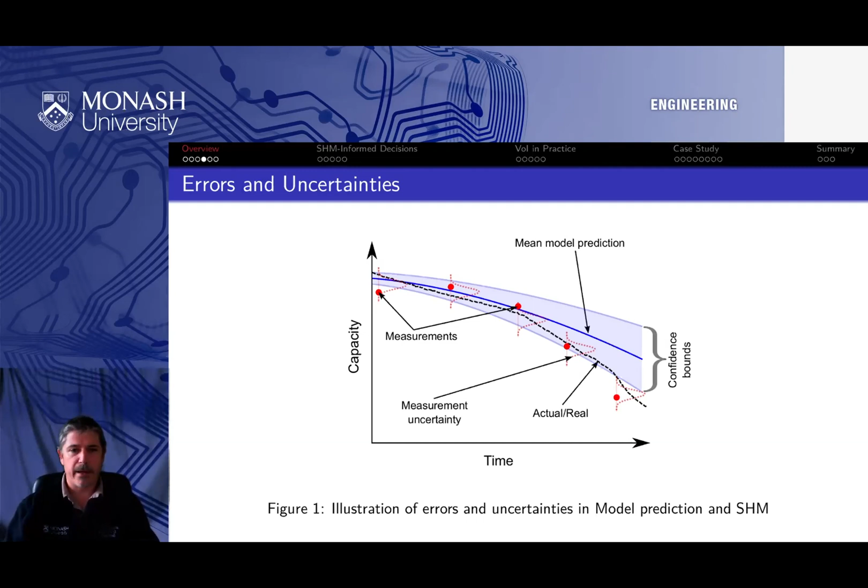We've also seen quite a range of structural health monitoring solutions. And so some may get us closer to the true value of a system. Some may push us away from it. Cost and accuracy are critical aspects of choosing a good structural health monitoring solution. So how do we choose one? How do we pick one over another?

And so to me, the value of structural health monitoring is rooted in the decisions that we make around the data it produces. So if we don't use the data, it has no value. So the first thing a client must be willing to do is to use the data, right? If they're not willing to use the data, they will derive no value. So we've got to ask ourselves, and we've got to ask our clients, the asset owners, what would you do without the data? And what's the associated risk there?

And then if you had the data, what kind of decisions might you make? And of course, with each of those possible decisions, there's an associated risk. And SHM's value is derived from the difference between those two situations, right? So you need to be willing to make different decisions on the basis of the data that's coming in. And that's where SHM gives value.

If your decision is going to be the same regardless of the data, well, then there's no value to be gained. So that's a critical thing that I don't think a lot of people talk about.

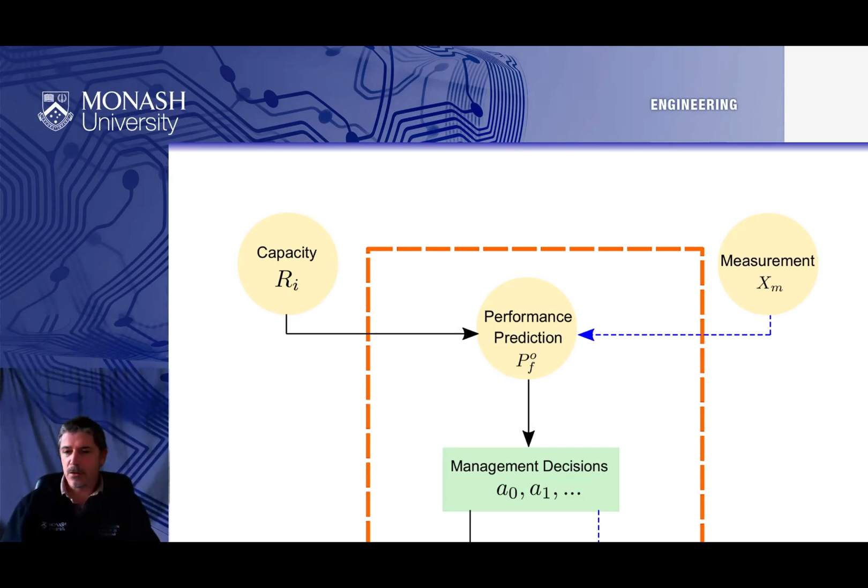So let's have a look at what this looks like in practice. Our research has really been trying to pull the fairly esoteric stuff you've just seen into real world application. And in the real world application, I'll just zoom in here a little bit, we have this kind of information where we have a capacity that we're trying to figure out. We've got some measurement that we might take, and we're trying to make a performance prediction, and usually it's a probability of failure. And of course, given different probabilities of failure, we'd make different management decisions on that basis, right?

And depending on whether or not I have the structural health monitoring data, I've got the benefits I would derive with and without the data. And the difference between those situations is the benefit that structural health monitoring will give me.

So in real engineering, we have tiers of complexity in our analysis, in our assessments, and in our measurements. So these are the different levels of complexity that we might consider. We might decide to use a line model for assessing a wide network of bridges. We might move to a grillage model for assessing a single bridge. We might then move to a three-dimensional FE model for getting in at a fatigue detail, for example.

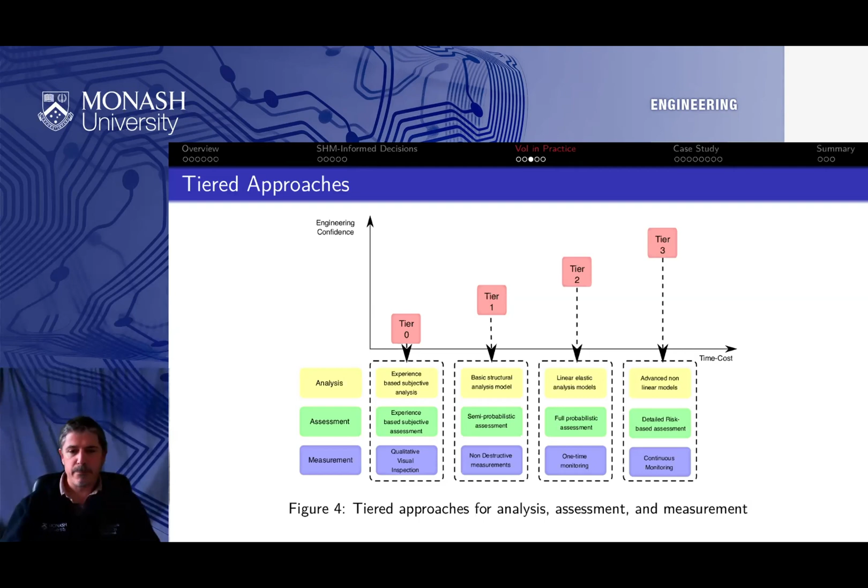So we can apply these tiers across the domains of analysis, assessment, and measurement. So our approach really works in a real engineering sense, because those tiers can then feed into our capacity estimates, our performance predictions, and the measurements that we take as well. And finally, we have the decision trees associated with all of those potential situations.

So before we see any information, we have our prior decision tree where we'd make certain decisions on the basis of what we think the situation might be. If we think about a particular type of structural health monitoring system, type 1 here, we think maybe it's unbiased and it's quite accurate. What kind of decisions would we make? And that's the pre-posterior analysis in the first instance.

And maybe I'm thinking I could derive some really good benefit from some really cheap sensors that aren't so accurate, but it doesn't matter because I'm really ignorant right now. I don't know anything. So a cheap system might really do well for me. So we can compare lots of different structural health monitoring systems and the potential decision trees that will enable us to arrive at an optimum decision.

So a case study, an example application of this. I need to emphasize this is not a real case study, but driven from a lot of my experience. So let's consider the idea that a bridge owner wants to allow an overload vehicle across a bridge. Straight up, should they strengthen or repair the structure? They don't really know. What kind of decisions are available to the bridge owner at this point? And then in that space, is structural health monitoring of some value?

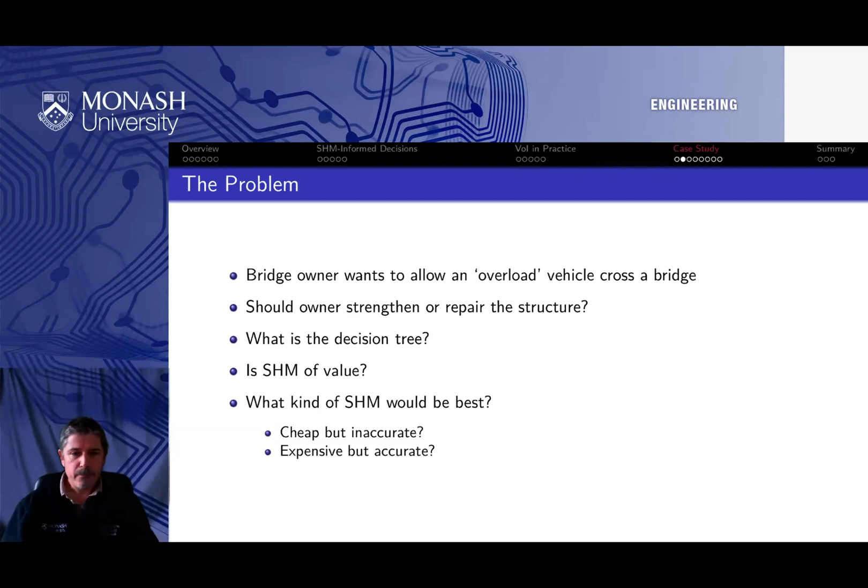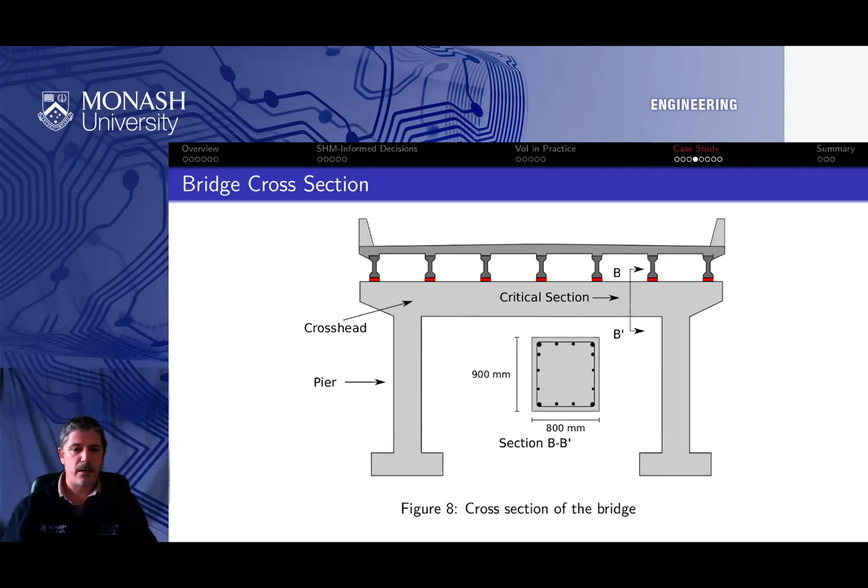So this is our bridge with our vehicle going over it, and there's lots of things we could look at on these bridges, but one of the things that seems to be an issue is shear on crossheads. So we take this example crosshead of the bridge, and we have a look at its shear, and we hypothesize what the decision tree might look like.

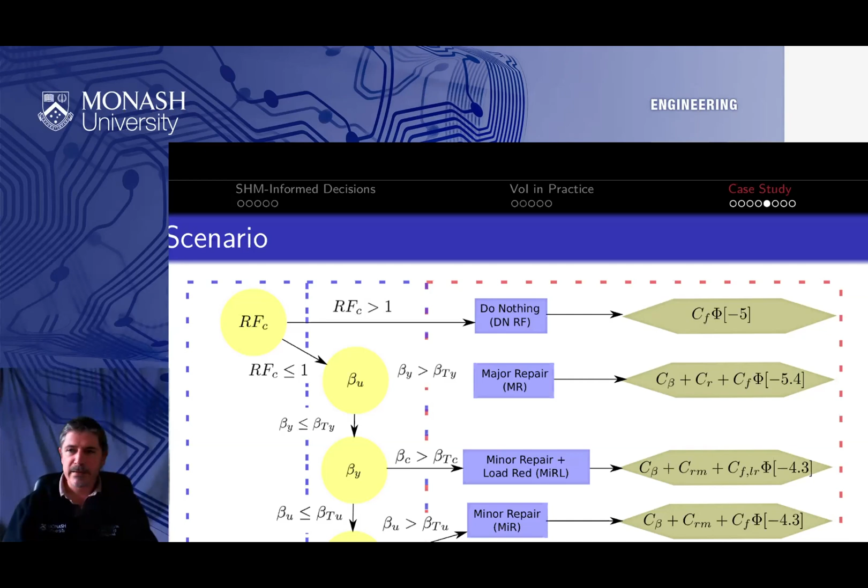So what I've got in this plot is where we start off in typical bridge engineering practice, where we look at a rating factor. And if the rating factor is greater than 1, we're on the top, in the do nothing space, where the cost of a failure times the probability of failure is our risk, and the probability of failure here, where we've got a reliability index of about 5. So these are extremely low numbers, 10 to the minus 7, 10 to the minus 8 kind of space. But that's the risk. That number over here is the financial risk associated with doing nothing.

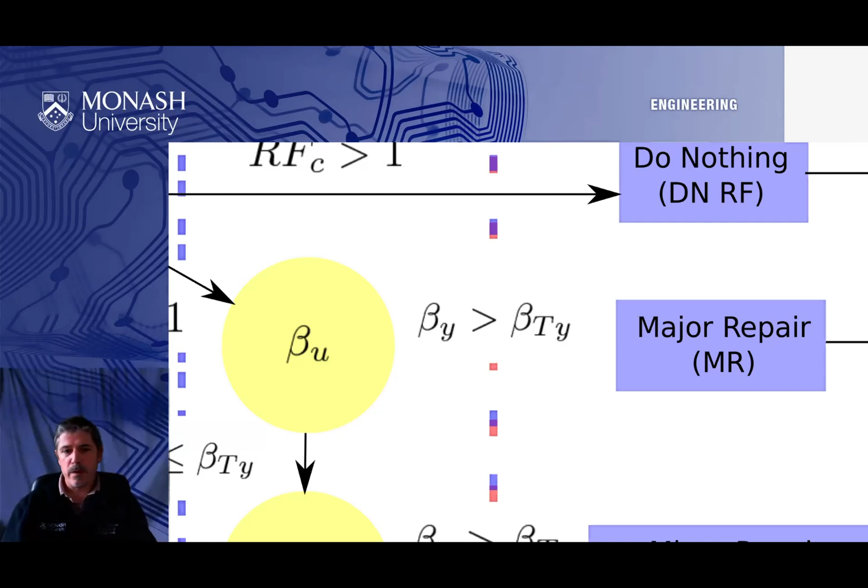But then let's move on down, right? Let's say, and this is more often the space I operate in, the rating factor is less than 1, and the owner is considering a major repair. And here we've got a target level of safety, beta TY, so for yield. And if we're finding that under this permit load we think we're unsafe here, well, then we may go for the major repair situation.

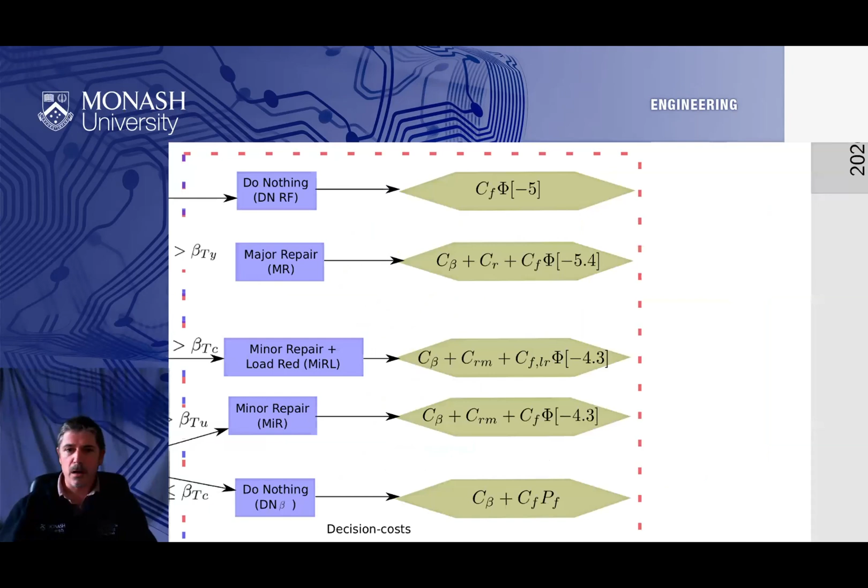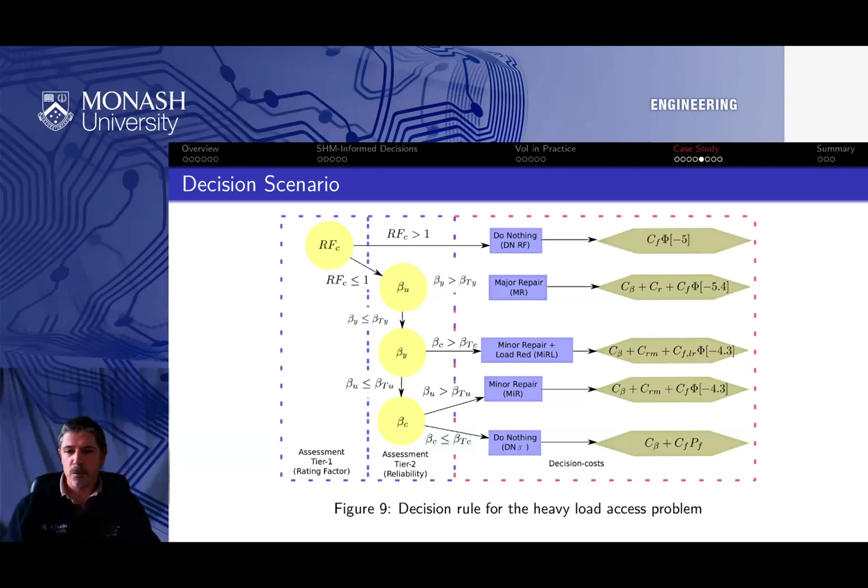And so what we're seeing here is the costs associated with each of the possible decisions. And you'll notice that at this point, we still haven't made any decisions as to whether or not SHM is in place, but at least now we have a quantified cost associated with whatever decisions we would make. And therefore, we can figure out the value that structural health monitoring can offer.

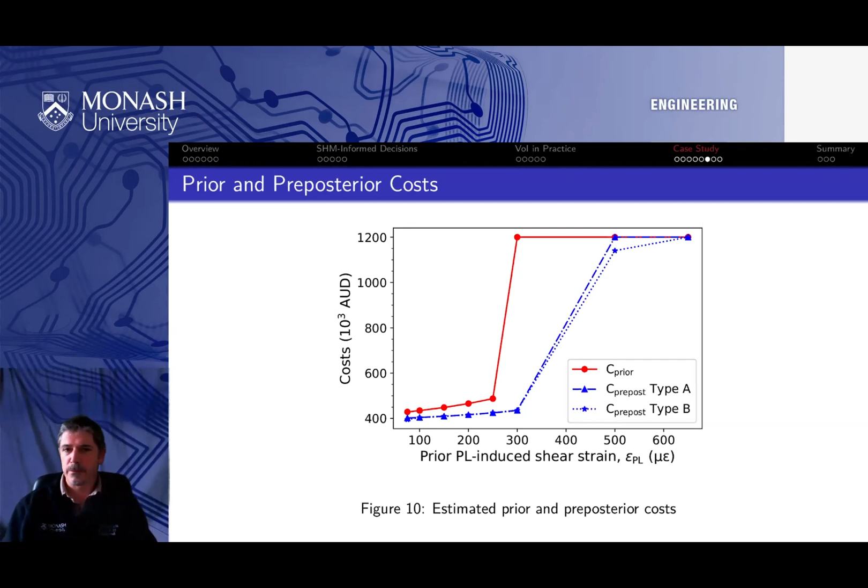And in the example, applying the pre-posterior analysis and using 2 types of structural health monitoring systems, this is the kind of costs that we're seeing. So these are the prior costs and the pre-posterior costs. So we can see that depending on the shear strain that this permit load will induce, we derive certain amounts of value with and without the structural health monitoring system. And so the benefit is the difference here between the red and the blue curves, right?

And then equally, the right-hand space makes sense also, because you can think to yourself, well, this load is really overloading the bridge, and so there is no way that I don't need to do major repair. So putting a structural health monitoring system on, it's not going to tell me something I don't already know, which is that I must repair this bridge.

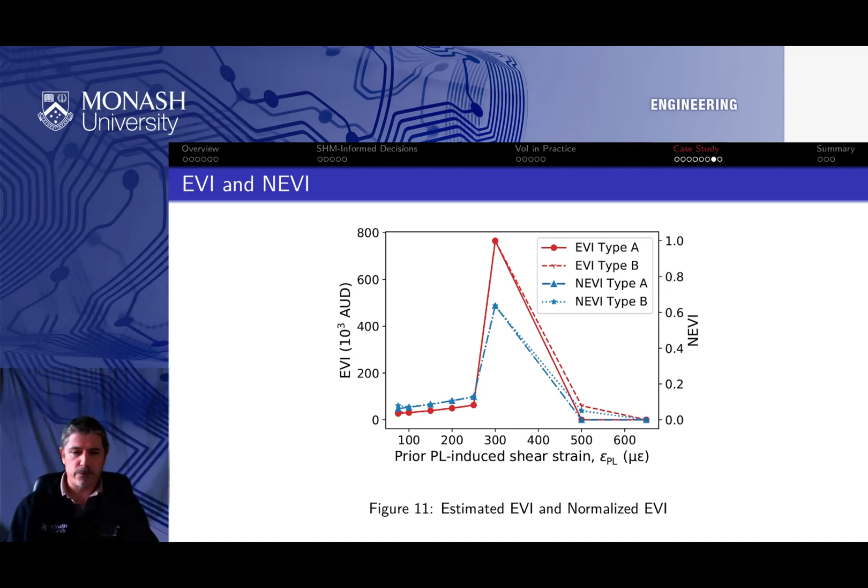So the value of the information that we derive from the structural health monitoring system is low when we're in the very low risk space, and it's low when we're in the very high risk space. Where it has real value is right in that middle space where I'm a bit unsure as to what's going on. And that's when we see the most value from our structural health monitoring. And so that's kind of what I'm able to plot here.

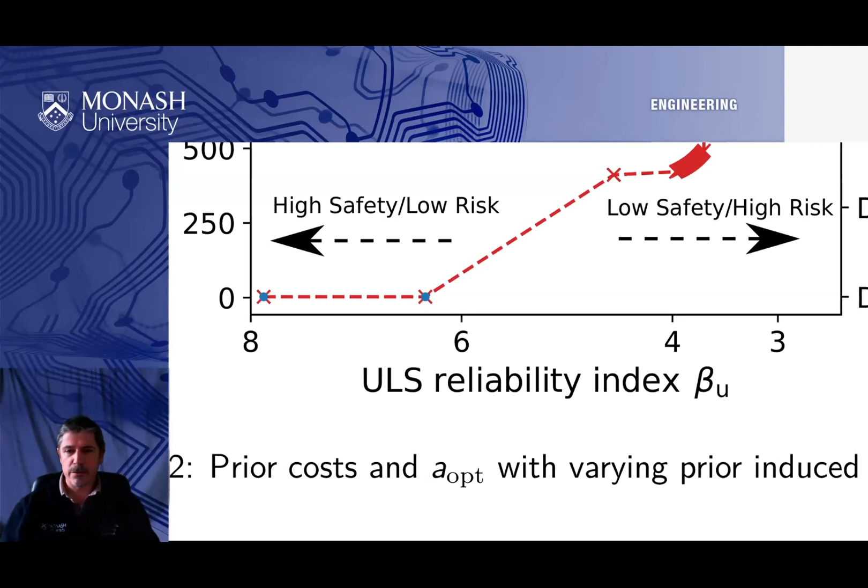This plot's a little bit more involved, I guess. But what we've got across the top is the shear strains. But shear strains on their own don't mean so much. So that's why along the bottom we've got the level of safety that these different shear strains imply. So this level of safety is reliability index.

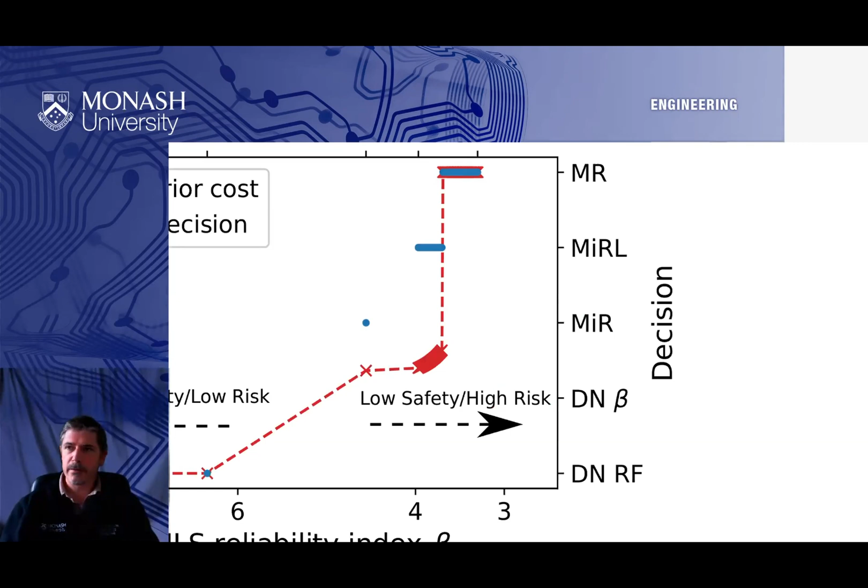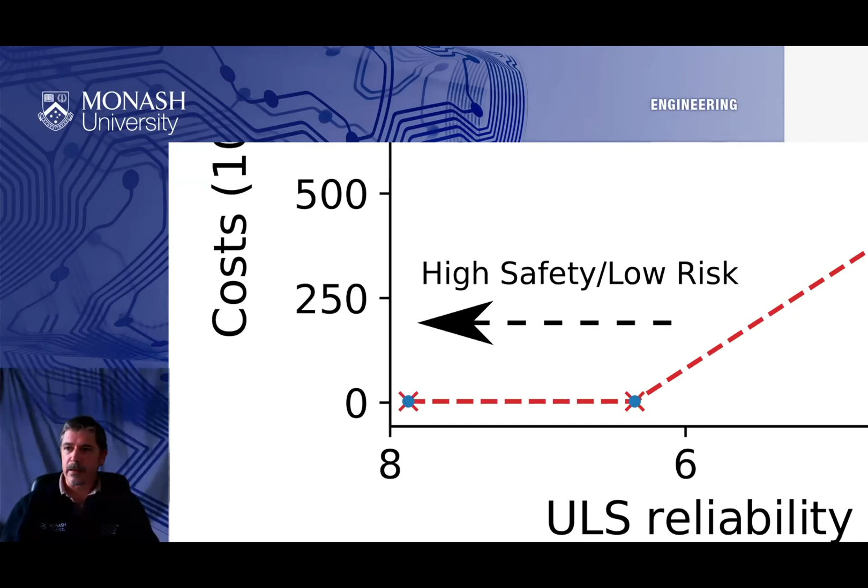When we're in regions of low levels of safety, so we're over here in the plot, the decision will be major repair, right? This MR space. When we are in super high levels of safety, which is a lovely place to be, of course, the decision will be do nothing, right? Which is the DN. So the rating factor has passed. So the decision outcomes associated with the different possible outcomes and the values to be derived from structural health monitoring are all things that need to be brought together.

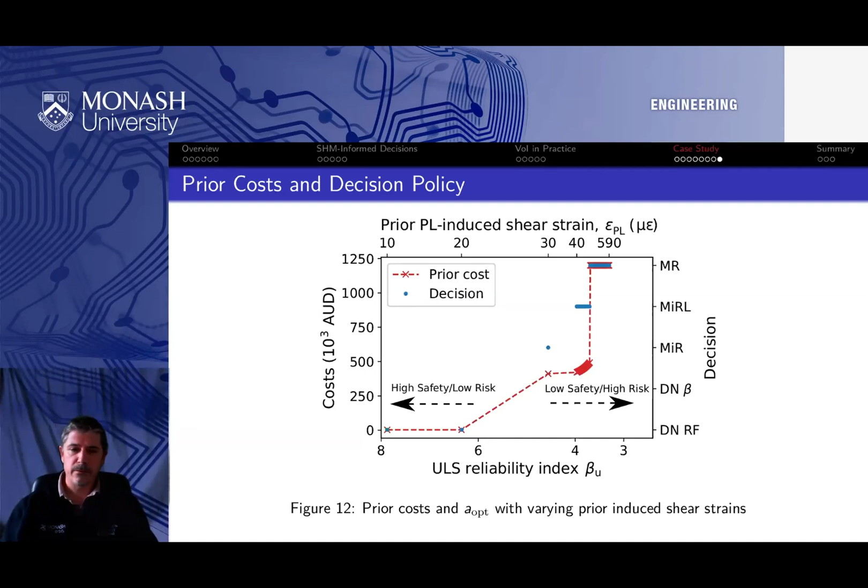So look, in summary, the things we have learned from this kind of work is that the value of information is the means to assess the financial benefit of structural health monitoring. And I think without that, it's going to be difficult to put this stuff on a BCA for clients. And one of the things we've also realized is that the reputational damage is tremendously significant. The aversion to any sort of risk must be priced in. And that reputational damage is a significant sum. It's not real money in a sense, simply a measure of client aversion to risk.

We have to consider the uncertainties. Without considering uncertainties, there's no change in decisions that could be made on the basis of structural health monitoring data. And as you've seen, the decision tree for a pretty realistic case study does require input from the owner in terms of their risk preferences and the costs that they associate with different outcomes, major repair, minor repair, load limiting, and so on. They need to really be a partner in a decision to apply SHM.

We saw as well that the value that you derive from structural health monitoring depends quite a lot on the prior, because the prior is subtracted off the pre-posterior. And so you need to have reasonably good estimates and engineering expert knowledge in there first before you can derive the real benefit from a structural health monitoring system.